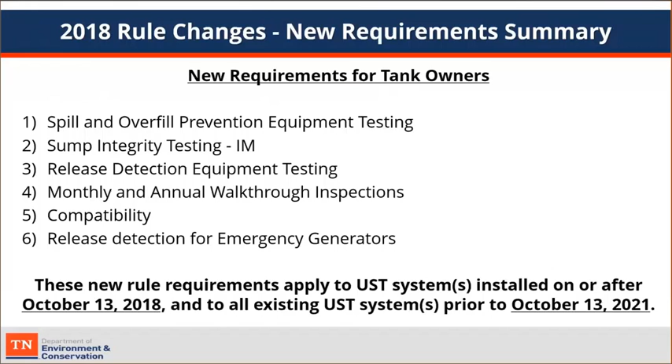Sump integrity testing if you're using interstitial monitoring as your method of release detection on your piping. Release detection equipment testing, so it's going to be an annual operability test that we'll dive into a little more later in the presentation. Your monthly and annual walkthrough inspections -- if you've not had a chance to look at that form, hopefully you're already using it, but we'll go over that at the end of the presentation as well, as long as time allows. And then we'll go over compatibility requirements and release detection for emergency generators.

All right, so all the testing that we require in these new requirements must be conducted by a qualified person as defined by EPA. That means there's 4 ways you can be a qualified person. You can either be a licensed contractor, certified by the device manufacturer that you're working on, approved by an authority having jurisdiction, which is us. If you can show competence, we can get you approval that way.

Also, conducted in accordance with our guidance, you can demonstrate adequate experience. So if you've been doing this for 15 or 20 years, that may get you in that way. The other way is to get certification from a nationally recognized organization, such as PEI, which is the Petroleum Equipment Institute.

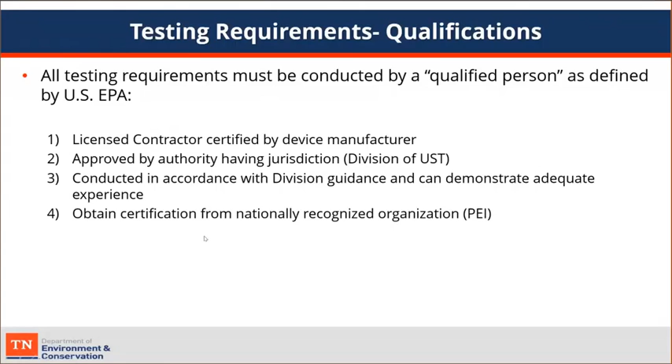All right, so what's new? Monthly walkthrough inspections is new for spill prevention equipment. Also, a 3-year spill prevention integrity test is new and part of the new requirements. And then your overfill prevention equipment, which is your flappers, alarms -- we'll get into that a little bit more also -- is a 3-year requirement. Record keeping requirement, we've mentioned that a few times throughout this presentation.

But the best resource is our actual monthly and annual form. It'll give you a breakdown of how long you have to keep everything and how long the tests are good for. Just to go over it with you, monthly spill prevention walkthroughs, you have to keep those a year, so you'll have 12 months of them. They're good for 1 calendar year.

And when we come out to do an inspection, it's not going to be anything new. We will ask for the last 12 months, so it may include 2 forms broken up.

3-year spill prevention device integrity test -- that's either a hydrostatic vacuum or pressure test on your spill prevention -- is required every 3 years. And the overfill device functionality test is every 3 years as well.

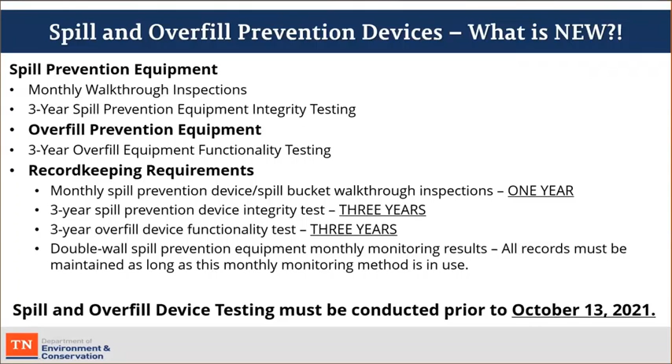Okay, so here's just some examples of the overfill prevention and spill devices that you would see at a UST facility. On the far left, just a regular spill bucket -- they're actually doing a hydrostatic test in this photo, so it's full of water.

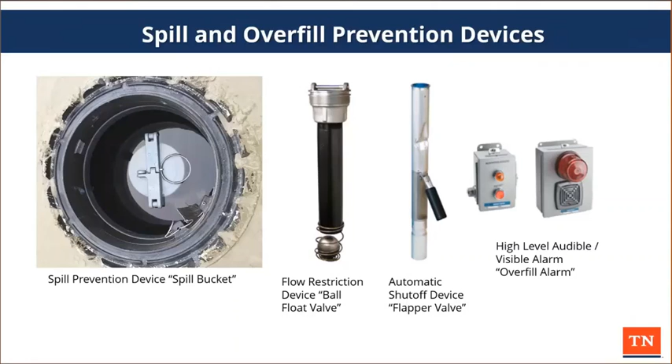Your flow restriction ball floats are phasing out. So as those fail during your annual inspection, you will either have to replace it with an automatic shut-off device, flapper valve, or a high-level audible or visual alarm that you see in the picture. You can talk to your contractor and decide what's best for your specific facility out of those alternate two methods of overfill prevention.

All right, so your action step is to conduct a spill prevention integrity test every 3 years, document the results on the approved form, which you'll see on the right of the page, or you can use a double-wall spill bucket with an electronic interstitial monitoring sensor.

If you're already performing interstitial monitoring on your piping, it really won't be much of an upgrade for you to monitor your spill buckets if you wish. You'll just maintain the records just like you currently do for your piping, and that will keep you from having to do a hydrostatic test on those spill buckets every 3 years.

The responsibility of the tank owner is going to be to keep a passing spill prevention integrity test within the last 3 years. So it's on a 3-year rotating basis. Every time it expires, you need to have another one done.

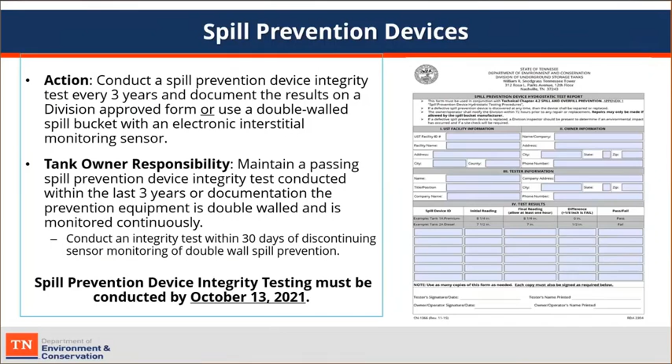If for whatever reason you decide you don't want to monitor, your sensors go bad and they're too expensive to replace, you can do away with the sensors in the spill bucket. You just have to begin doing the integrity test 30 days after discontinuing your sensor monitoring, and then every 3 years thereafter you'll still have to do the hydrostatic or vacuum pressure test on the spill bucket.

All right, overfill devices. This is your functionality testing on overfill. It's got to be done at least every 3 years, and those records must be maintained within the last 3 years. So you got to keep one until it expires, then have another one done.

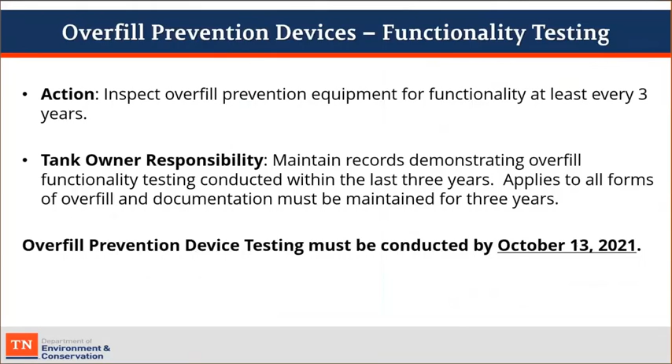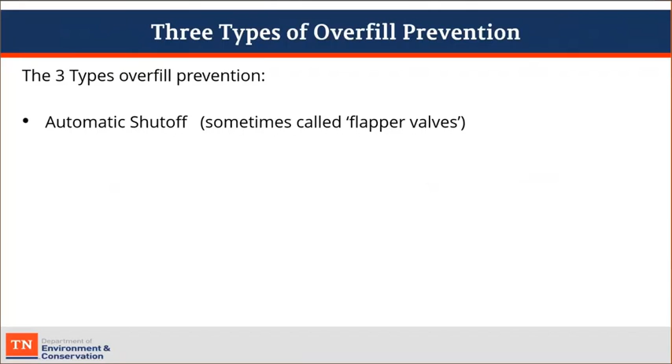So 3 types of overfill prevention, as I showed you in the slide earlier in the photos. You got automatic shutoff, which is flapper valves, set to engage at 95% of the full tank volume. Flow restriction, which is the ball floats, set to engage at 90% of your tank volume, and they cannot be replaced or repaired after install.

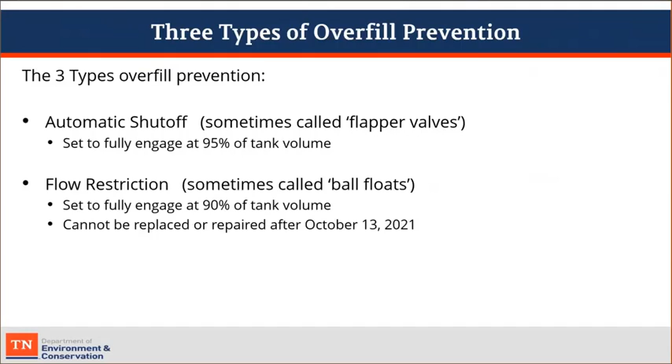Overfill alarm. These are set to activate at 90%, and it's a loud alarm that's outside your facility where your delivery driver can hear or see the alarm activate.

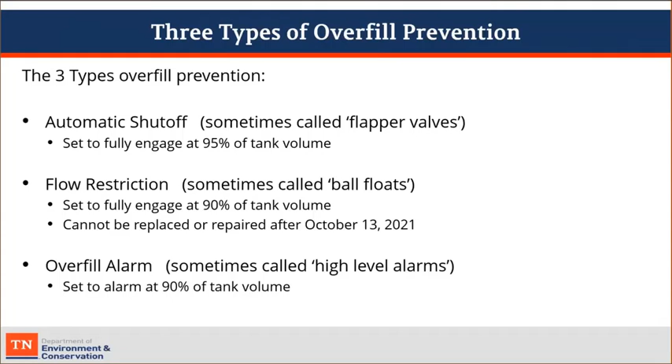A little bit deeper dive into automatic shutoff devices. They slow down the flow and actually stop the flow of product at 95% in the tank, and they go in your fill pipe as part of your drop tube.

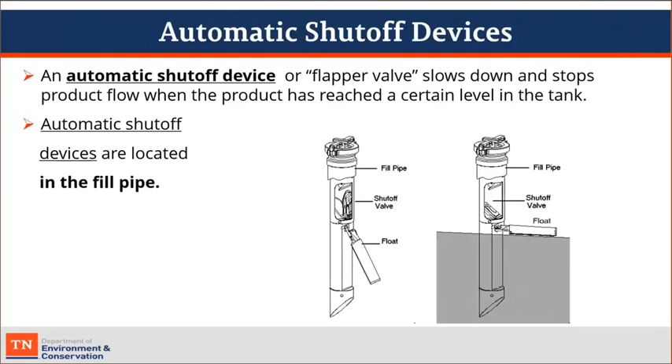There's an example of how the float works.

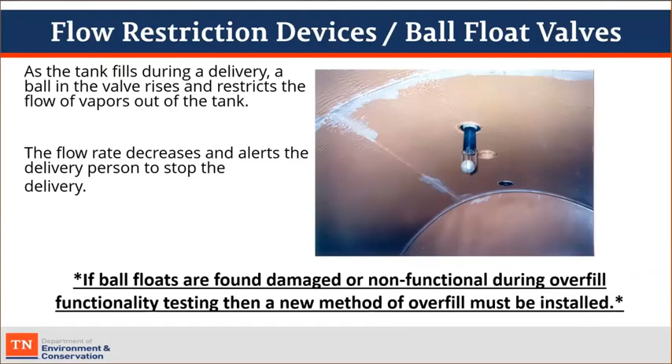Flow restriction or ball floats sit in the top of your tank, the little cage with a ball hanging in it, and as your tank fills, the ball floats in the product and shuts off the air being able to leave the tank. So your vapors go out that hole in that little tube in the ball float, and as that ball touches the bottom of the pipe, it cuts off that and greatly reduces the flow of the delivery to the tank to alert the driver that it's almost full.

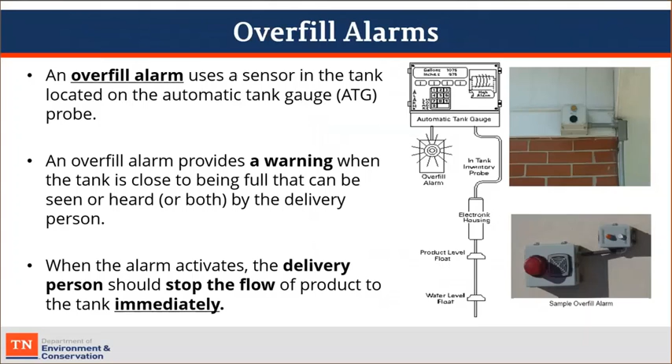Overfill alarms are pretty self-explanatory. They're outside your facility somewhere, and as soon as your ATG probe reaches 90%, they will alarm and notify the driver. All these things are checked during your operability test as well to make sure that they're working properly.

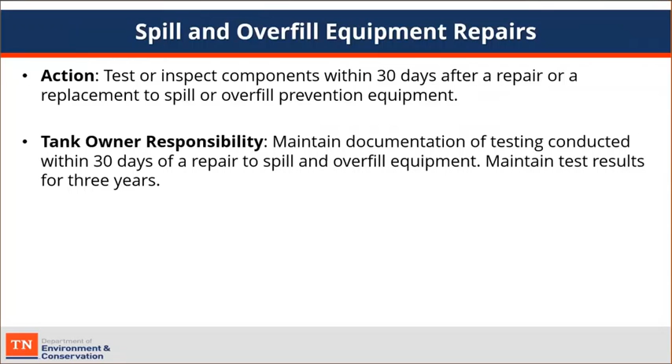Okay, so repairs. You have to test or inspect the components within 30 days after a repair or replacement to the spill or overfill prevention equipment. Hopefully they'll do that as soon as they do the repair, so you wouldn't have to call somebody out twice. Hopefully you just have them do it that day. And then you have to maintain that documentation for 3 years of your repair.

All right, interstitial monitoring. This is required at every site that was installed after July 24th of 2007, but there may be certain facilities that are utilizing this that were installed prior to that. So if you're using it for your method of release detection, even if you installed it before 2007, if interstitial monitoring is your primary method of release detection, you must conduct the containment sump testing every 3 years.

And you have to maintain that test for 3 years. So once you have it done, it's valid for 3 years, then you have to have another one, and you have to keep that record too in case we come to do an inspection in the interim.

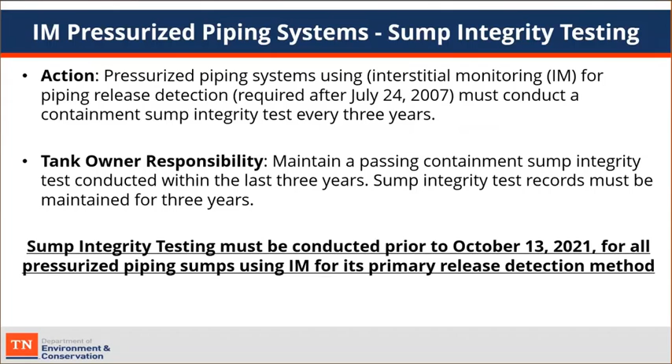All right, so sump repairs. I'm sure we're going to see a lot of this in the future, being that this is the first go-around of actually testing these sumps, and some of them have been in the ground for well over 10 years now.

So the biggest thing as an owner is you want to make sure that any repairs that are being done are fuel compatible. So if you have a sump that has to be repaired, make sure you check with your contractor that it's a UL approved repair device that they're using, and it falls under section 2447 of the UL requirements.

And just make sure you have that conversation with them if you do have to have some repairs done, because there are some products on the market that are made to repair sumps, but there's also Flex Seal and all sorts of other things, so you just want to make sure that you're getting what you pay for.

Also, once you have a repair done, your sumps must be integrity tested within 30 days of that repair, and then you have to maintain that record for 3 years, just like you would a normal test. Also, any repairs to your UST system, as always, have to be maintained for the operational life of that system.

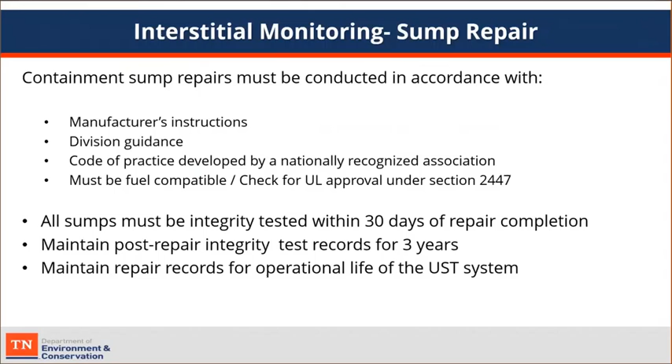All right, so hydrostatic testing. When you do water disposal, if you have water disposal questions, we do not regulate the disposal of that test water. The Division of Solid and Hazardous Waste Management and the Division of Water Resources are both at every local field office. If you have questions about how to deal with your test water, contact those agencies or us, and we can get you in contact with them.

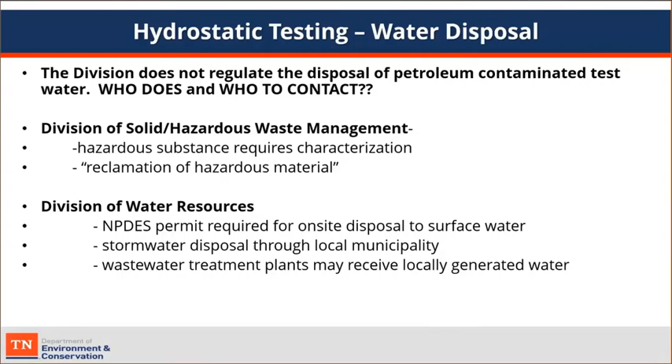Okay, so operability testing. This is annual testing of electronic and mechanical release detection components. So you have to maintain the 3 previous annual tests of this, and it would include your line leak detectors, your annual function test on those, your annual interstitial monitoring tank and sump sensor tests.

Also, ATG and other controllers - your automatic tank gauge has to be functionality tested. They're going to make sure that everything alarms when it should, and each manufacturer has its own protocol for how to do the operability test on it. But they'll be checking to make sure the alarms alarm when they should. They'll be making sure that your system's configured properly and wired up right, and then they'll test the battery backup to make sure if you have an outage, you don't lose all your test results.

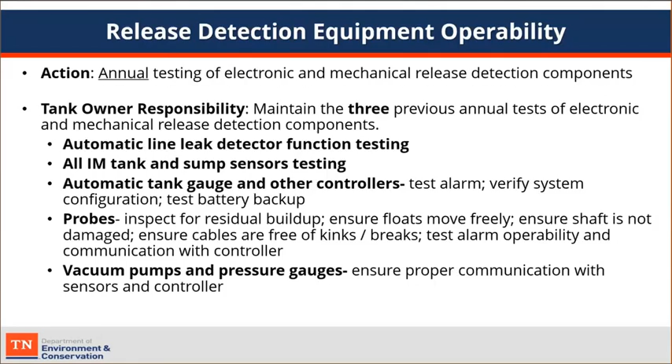They'll remove the probes from the tank, make sure you don't have any buildup, and that your floats are moving freely, no damage to the shaft or anything like that. And, less common - I don't know of anywhere in Tennessee we have it yet - but vacuum pumps and pressure gauges have to be checked if you have those in place, to make sure that they have proper communication with the sensors and the controller. But like I say, that's the least common thing that I know about in Tennessee.

Okay, so here's some pictures of what they're going to be checking. Top left is just a typical ATG tank gauge - it's a Veeder-Root console. Below that is an interstitial monitoring sensor and a submersible sump. And then you've got an ATG probe. The floats are separated there to show you what they'll be checking.

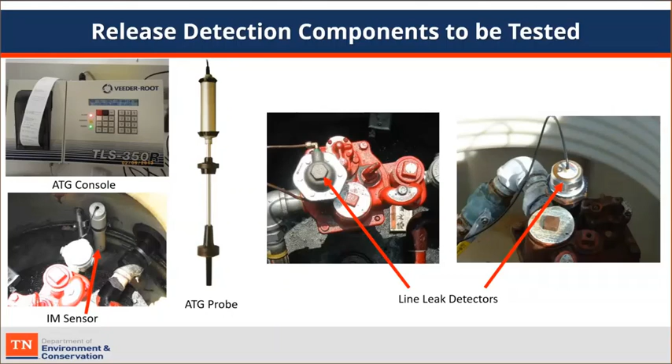They'll be sliding both of those floats up and down to make sure that they alarm as they're programmed in your ATG. And your line leak detectors are attached to your pump head in most configurations, shown in the far right pictures.

All right, jumping to walkthrough inspections. These walkthroughs have to be done every 30 days. I'm going to go over the form with you at the end - hopefully we've got plenty of time to do that and show you what questions are asked and what's applicable in each configuration. You have to maintain the monthly records for those 30-day walkthroughs.

It just consists of spill prevention device checks - checking your spill buckets for liquid, debris, or damage. That's really nothing new off of the old requirements; we just included it into this form where everything you need to do for your facility each year is on our monthly and annual walkthrough form. You'll check the tank fill risers, make sure your flapper valve's not damaged and that you don't have any obstructions in the fill pipe.

Also going to check the operation of release detection equipment and make sure that you're getting your monthly passes - if you have an ATG, make sure all your sensors are working right if you're on interstitial monitoring, and make sure that you have a pass from your SIR vendor if you're on SIR. You'll also be looking for the presence of alarms or other unusual operating conditions, and make sure that your release detection records are current.

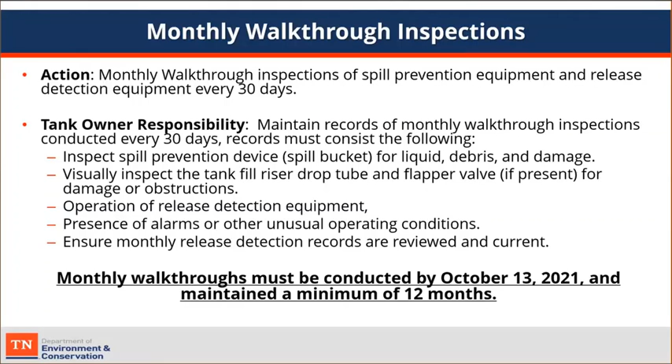All right, so every 30 days, remove any liquid from your spill bucket, and really you should be doing that after each delivery just to make sure that you don't degrade your spill bucket prematurely. I recommend checking them every time you get a delivery, but every 30 days at least, you need to look for liquid or debris in your spill bucket, check for cracks or any damage, and remove any fill pipe obstructions that you may have if you can. I mean, a lot of times you can't reach them - you have to probably get a contractor or somebody in there to do it.

You want to make sure your fill cap fits properly. You've got a little O-ring on the bottom of it. Make sure that gasket's in good shape, because that's the easiest way to get water into your fuel tank is if that gasket either falls off or becomes cut or torn.

And then make sure your fill cap's not touching the bottom of the spill bucket lid. Most of the spill buckets in UST facilities are able to be driven over, and you don't want the weight of a car pushing down on the top of your tank to dent it in. That can cause quite a bit of damage to a tank if it's in contact with the lid.

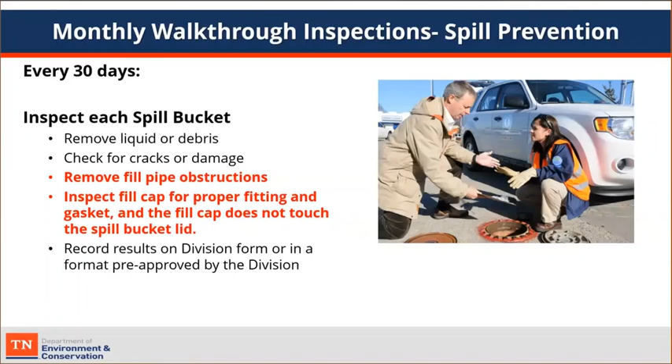Just record your results on that form, and we'll go over that here in a few minutes.

All right, so if you're on SIR, which is statistical inventory reconciliation, every 30 days review your data. Make sure you have good accuracy and that your daily fuel level readings are matching up with your sales. Check your tank monthly for water. Make sure you use the right water finding paste. My favorite one is Sar-Gel. If you got any experience with them, I just think it's the easiest to read.

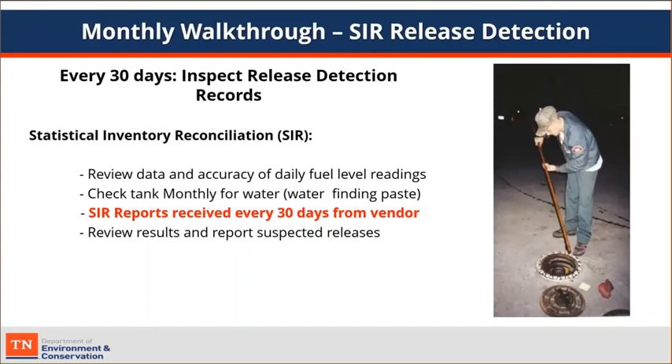SIR reports received every 30 days from a vendor, so that means you get a result every month from them. Make sure they're sending that to you, and that you're sending the results to them in a timely manner to get it back in time. Review your results once you do get them. If you have any inconclusives or fails, make sure you report those to us as suspected releases in the 72-hour time frame.

All right, monthly walkthrough. So this is for if you got an ATG. What you want to do on an ATG is make sure you got no alarms or any unusual operating conditions, which would be an alarm.

Make sure your monthly results show a pass for each tank monthly, and make sure you don't have any fails. Report all suspected releases. So just like always, if you do have something come up, let us know. You got 72 hours and we'll come check it out for you.

Conduct a static test if no monthly results available. So if you're running CSLD, there are certain situations you'll run into if you're a real high volume site where you may not have enough idle time to get a pass on CSLD. I've seen it at a few sites over the years. Most people, I guess at the tank owner level, don't know that you would have to shut your station down at night for like 4 hours, but you can run a static test if you don't have a CSLD pass by the end of the month.

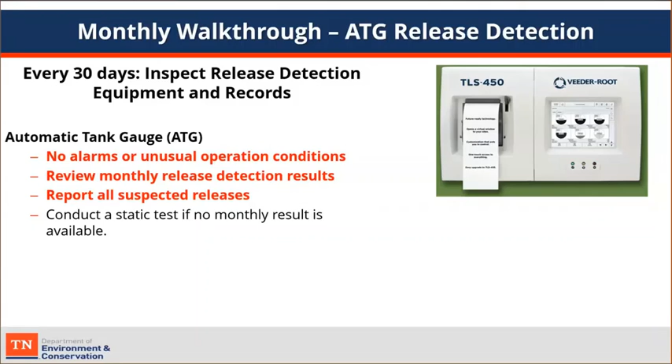Takes about 4 hours to run that test manually. But you can get with your contractor and discuss that, but it is an option to keep you from having to do a tank tightness test if you miss a month.

Monthly sensor or interstitial monitoring, we've changed to that. So requirements for that would be to check your monthly sensor status and alarm history reports. Make sure that all your sensors are normal, that you have no alarms. If you do have an alarm, document it on our monthly form. There's plenty of area to do that.

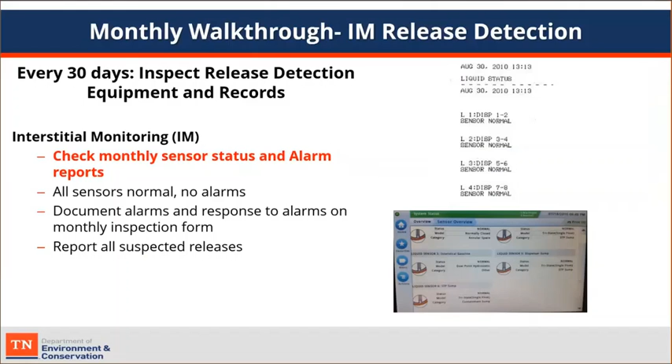We'll go over that here in a little bit. Make sure that you document the alarm and your response to the alarm and put a date on there so we know how quick it was addressed. If you're not able to address any alarms within 72 hours, make sure you report those as suspected releases to us to avoid any fund eligibility issues.

All right, so here's a shot of the first page of our form. These walkthrough inspections, each device manufacturer has a little bit different instructions, but the form, if you use our form, you will meet this requirement.

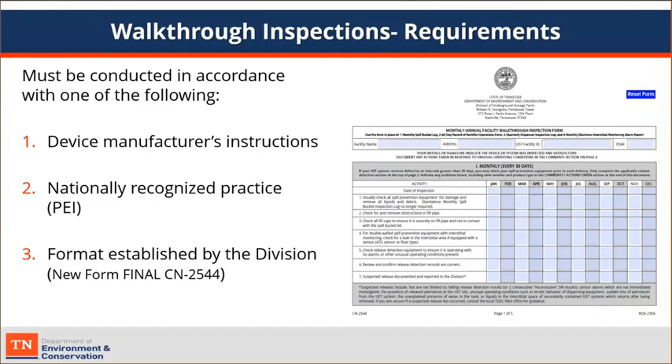So there's 3 ways to meet the requirement. You can use the device manufacturer's form, the nationally recognized practice, which would be a PEI form - it's a lot longer than ours - or you can use our form, which is the CN 2544, that I'll go over with you in more detail at the end of the presentation. Any of those 3 forms, you will meet the monthly walkthrough requirement if you use.

Annual walkthrough inspections. These have to be conducted once a year, so once every 12 months, and they consist of looking at your sumps, checking for damage, leaks to your containment area. If you see fuel in there, you definitely need to let us know, unless you can see where it's leaking and it's not like at the bottom of a penetration fitting or something like that, and you can remove it and repair it.

For double wall sumps, using interstitial monitoring, check for a leak in the interstitial area. I've never seen a double wall sump installed in Tennessee, but I'm sure it's coming in the future.

So that is an extra step. Most of our containment sumps are single wall at this time.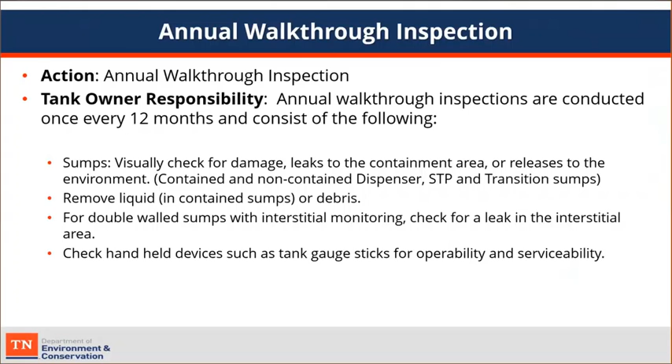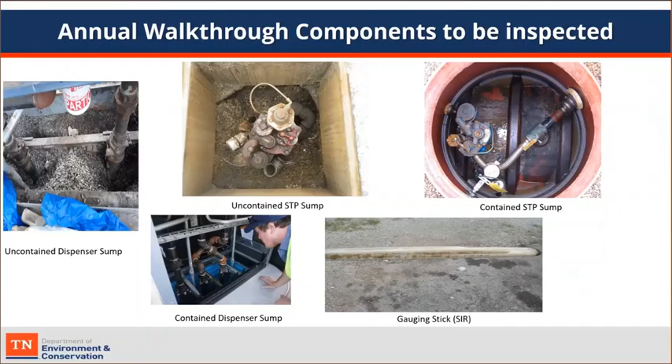Okay, record keeping, and like I said, this will be explained a little better when we get to the form itself. But this is what you have to keep for 1 year. So a list of each of the areas that you checked on your form, and if those areas were acceptable or needed action taken. Also, in the comments form, you'll put a description of the actions that you took to correct any issues.

And also, if you receive less than one delivery every 30 days due to infrequent deliveries, you need to keep your delivery invoices if your spill buckets are not checked every month. So if you're a hospital generator or something like that who only gets 3 deliveries a year, then you can keep your delivery invoices and make sure that you check them when you get the delivery. We still recommend checking them every 30 days throughout the year, but that is another option.

Okay, so general record keeping, there's several of these, but this will be gone over again on the form. It's reiterated there. So you have to have 12 months of monthly tank leak detection results, no matter what method you're using. An annual line leak detector test, annual release detection operability test, line tightness test, or 12 months of your piping monthly monitoring results if you're on interstitial monitoring.

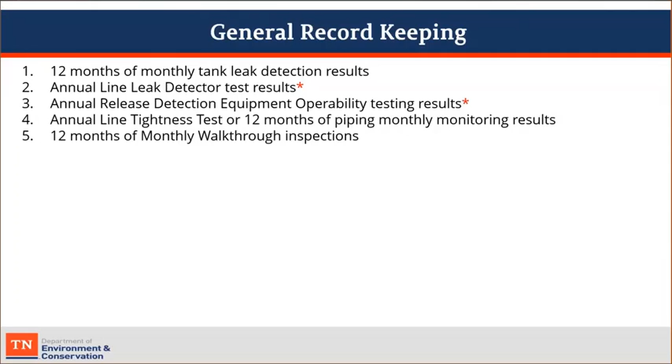All right, let's see. So, 12 months of monthly walkthrough inspections, that's all on that form. Your annual walkthrough inspection can be done once a year.

Spill bucket integrity test conducted in the last 3 years, unless you're using an electronic sensor. Overfill functionality test conducted in the last 3 years. Sump integrity test conducted in the last 3 years, only if you're using interstitial monitoring. And your corrosion protection test, that's not changed, it's every 3 years just as before. But you need to keep the last 2 of those tests.

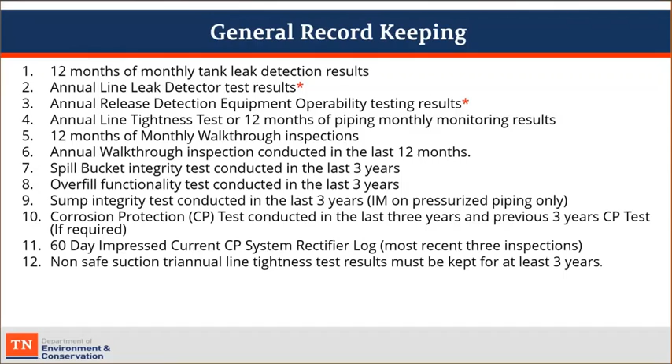60-day rectifier log has not changed, but it is on this new form. And your triennial testing, if you have American suction, which is determined to be non-safe suction, you have to do that every 3 years. And then all leak detection system maintenance, service within 1 year from the date of that repair.

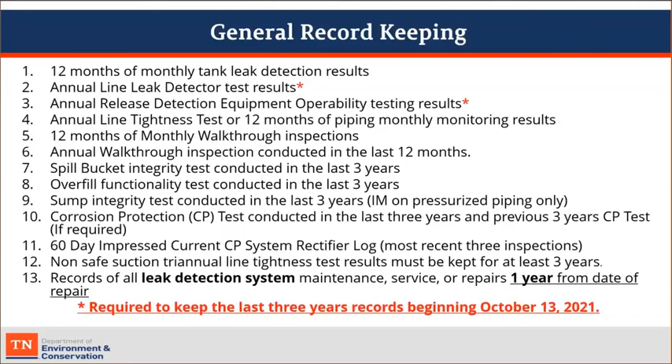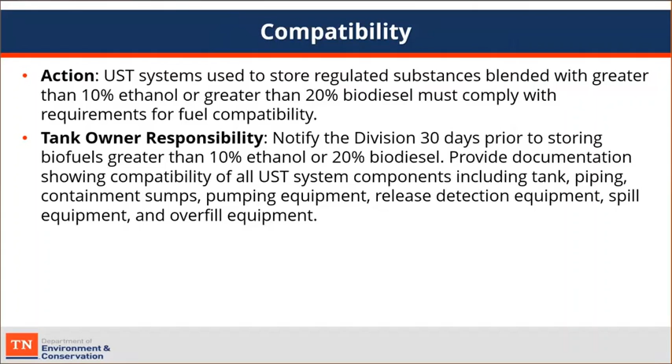All right, compatibility. If you plan on storing greater than 10% ethanol or 20% biodiesel, you must make sure that your tanks are compatible to do that. We've been notified that some companies are interested in exploring E15. Make sure, if you decide to do that with your oil company, that your tanks at your facility are compatible to store that, because that's something we'll be asking for if we do see E15 or anything greater than B20 at your facilities. Be able to provide documentation showing that compatibility for your tanks, piping, sumps—everything's got to be compatible with it. So just make sure you discuss that with your oil company and your contractor before you decide to go to E15 blended fuel.

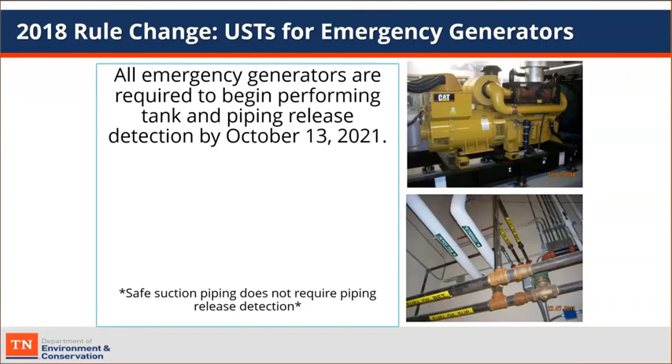All right, emergency generators: they have to perform release detection beginning yesterday. Safe suction piping does not require release detection, but there are certain circumstances where you may have a return line that is pressurized—we can help you deal with that on a case-by-case basis. If you have any questions or would like us to come out off schedule to look at your facility, if we've not been there in a while, we can certainly work something out with you. But the biggest thing is you have to do release detection on your tank going forward.

Go ahead, Mark, I have another question from Daphne Berry. All right, she's just clarifying the hydrostatic testing—hydrostatic testing is only required for IM sites, correct?

On sumps, yes, spill buckets everywhere have to be tested hydrostatically, vacuum, or pressure. But as far as the sumps for your piping, yes, only if it's interstitially monitored does it have to be tested.

Let me open Daphne's mic up just to make sure. Yeah, there was no confusion there. Daphne, your mic should be unmuted. Are you there, Daphne? All right, she may not have a mic on. We'll come back to Daphne if she becomes available. So, all right, thank you, Dustin. That's the only question I have right now.

Awesome. All right, so if you've got questions over generator systems, contact the local field office regarding that system, because each one of them are a little different. There's no cookie cutter mold for a generator system. They're all installed in different time periods with different levels of technology, and really those are sort of like marinas. They're on a case-by-case basis.

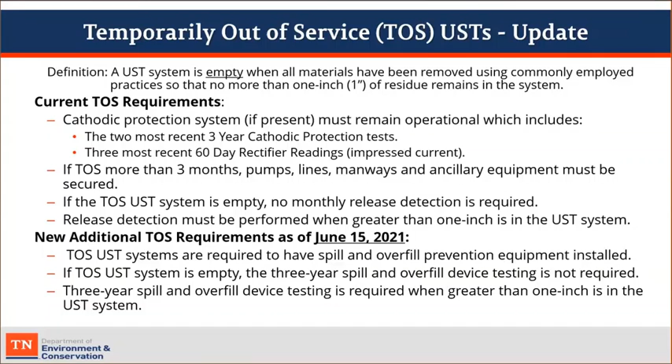Additional requirements as of June the 15th. TOS systems are required to have spill and overfill prevention equipment installed. And if the TOS system is empty, the 3-year spill and overfill device testing is not required. But if you do have greater than an inch in there, then you have to keep up with your 3-year spill and overfill testing also. Spill and overfill device testing is required when greater than 1 inch in the tank. So hopefully that covers that.

Okay, I won't go over much of this, but just to give you a quick overview of how our fund works, and to let everybody know if you don't already, which I'm sure you do, tank fees have been suspended from this year until June the 30th of 2026. So you don't have to worry about paying the $125 per compartment fee to us anymore till June the 30th of 26.

Let's see, another change is, as of June the 15th of this year, the fund entry level deductible is now based upon your operational compliance status at the time of your release. So we will come out and do an inspection as soon as we're notified of the suspected or confirmed release, and it's pretty much a routine compliance inspection, and that's what will be used to determine your entry level deductible into the fund.